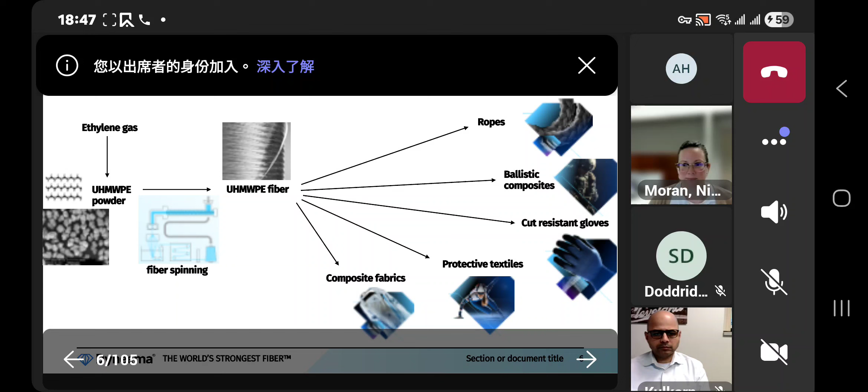Last but not least, also on the fabrics and composite side, we have some nice examples of market launches based on our innovation, and that's where we're going to start today. So Meredith will start off with a short presentation on composite fabrics. Don't want to take too much of Meredith's time, so Meredith, the floor is yours.

Meredith, is she in? Meredith, if you're on mute... we heard you for a second, Meredith. Am I back, and can you hear me? You're back, and we can hear you.

Great, okay. So this talk will be maybe a little different from the rest you've heard over the last couple of days, and a bit shorter. Partially because at Dyneema, at our core, we're not really formulators, so our value proposition is not so much in what additive package we can offer to solve a customer problem. Instead, we're essentially a brand based on a technology platform. So although in markets where we're already well established we do innovation based on market pull and develop products based on deep understanding of customer needs, generally the way we grow into new markets is to do some amount of tech push, and we look for new areas.

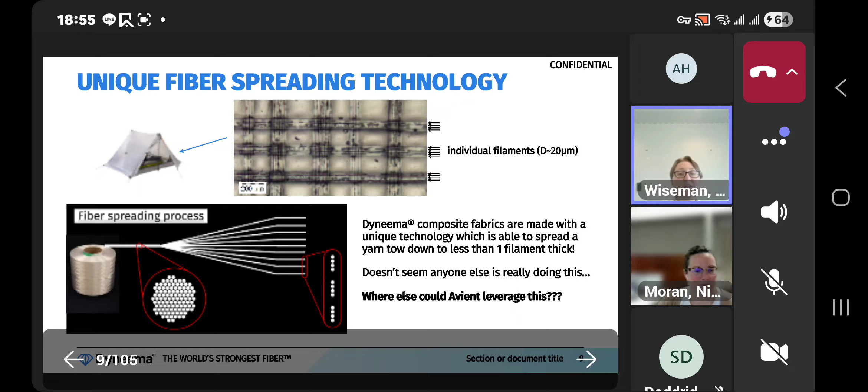Right, so I've only so far shown you applications that use a form factor like a fabric, but there's no reason to limit yourself to fabrics. It could be some other form factor. Even staying in 2D, you could think of this as a general way to reinforce a film, which is maybe too weak to do whatever it needs to do. In other words, it could function like a scrim to reinforce a film. Or if you want to think in 1D, you could use this as a unidirectional tape. And maybe you could take that tape and wrap it into a three-dimensional shape, etc.

It also doesn't need to be in lightweight applications. You could also use this in a conventional composite if you needed to minimize the ply thickness to achieve some kind of performance benefit. Or even in general, if you're making any kind of unidirectional composite and having trouble with tow spreading, this could be a way to improve the quality of your product.

So again, open question to you: could you use this? Could your friends use this? Can you think of any applications or areas where this might come in handy? If so, please reach out and let's have a conversation. And yeah, that's my last slide. Thank you.

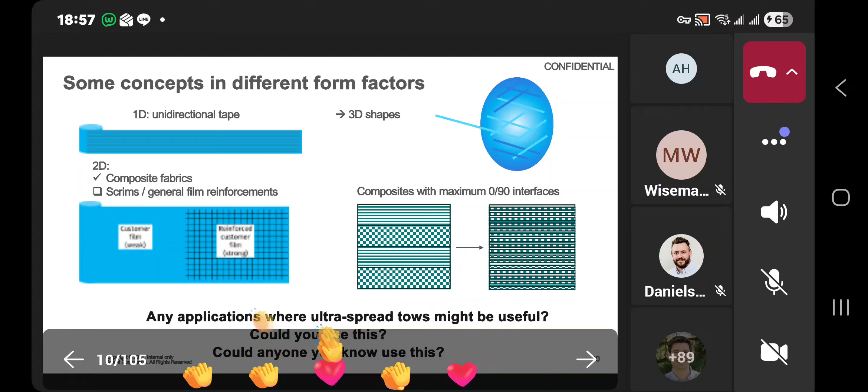Well, thanks a lot, Meredith, and thanks for the invitation to all of us to think about this. Like Ashish said, the whole should be bigger than the sum of the parts, and I think that is also an example where we really try to leverage all the knowledge we have in Avient, especially in the field of composites.

Thanks for that. We move to Judith. Judith is one of our experts — oh no, sorry, we go to Raoul and Hans first on the fire resistance for ballistic armor. So Hans, I think you start off.

Yes. Okay, I'm doing this presentation together with Raoul. Raoul is a member of the innovation team, and I'm part of the marketing and sales team. We will tell you about the efforts we have done to increase the fire resistance for ballistic armor based on Dyneema. Next slide, please.

I will have a short talk about what Dyneema is and also the need for the fire, smoke, and toxicity properties that we see in the market. Raoul will introduce the two routes we have explored to improve those properties, resistance against fire and smoke. And in the end, we come with short conclusions. Next slide, please.

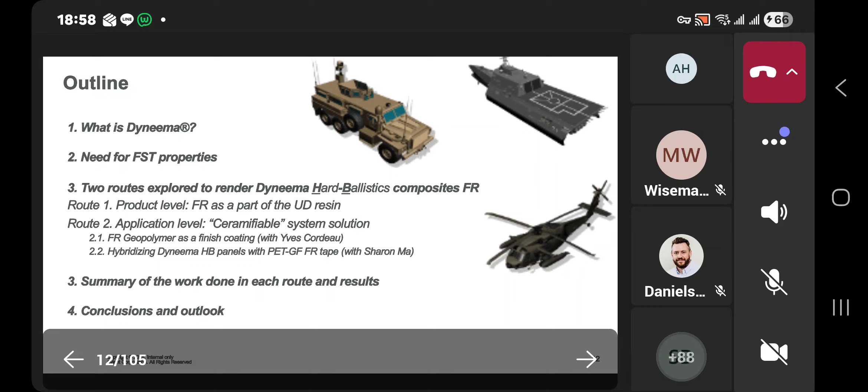Dyneema, as also Meredith said, is a fiber made of ultra-high molecular weight polyethylene. It's 15 times stronger than steel, and still light enough to float on water. With this fiber, we make so-called unidirectional sheets. You see here the fibers put parallel next to each other. There is a resin included to keep those fibers together, and we add other layers of fiber perpendicular to the first one — that's how we make a UD.

And we sell that on big rolls. Our customers then make the armor panels out of it by consolidating in a press. Next slide, please.

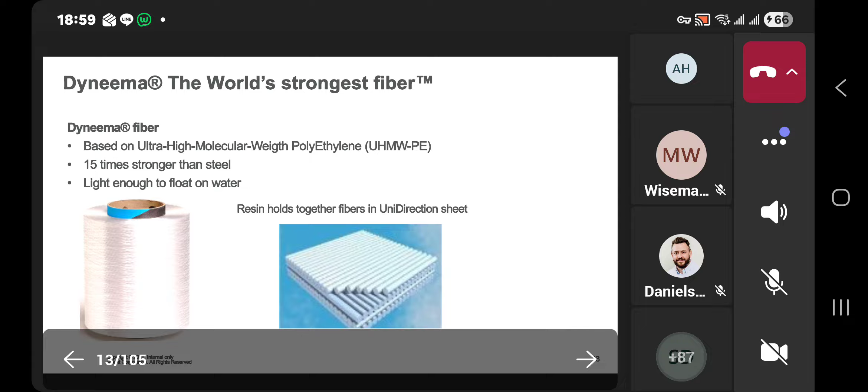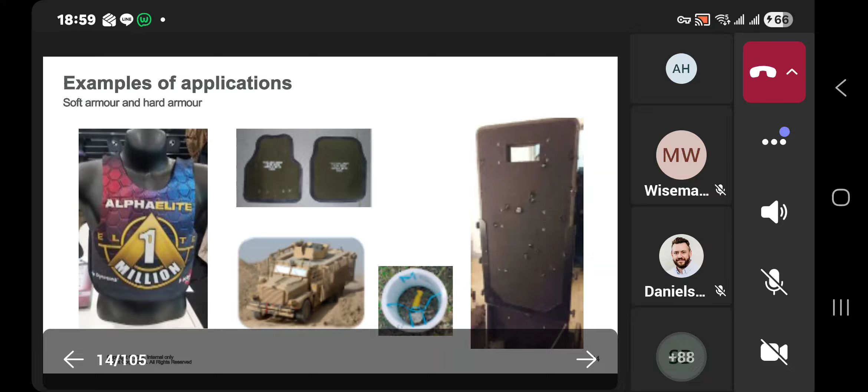Here you see some examples of hard ballistic armor and soft ballistic armor. On the left, one of our customers has sold over more than 1 million vests to the US law enforcement community. On the right side, you see an example of a shield, and this shield has been used and saved lives in the Bataclan events in Paris in 2015. Next slide, please.

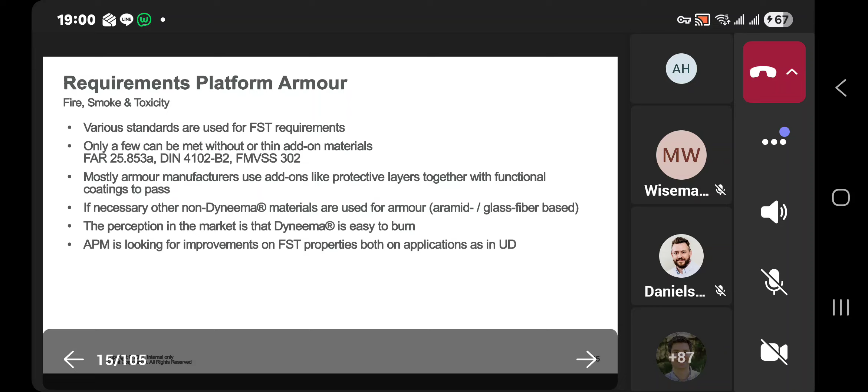What you see in platform armor is that there are typically requirements on fire, smoke, and toxicity. There are various standards used for these aspects. We can meet a few of those, which include a vertical flame test with our material. Mostly armor manufacturers use add-ons like protective layers or functional coatings to pass their test — that could also be glass fiber or aramid fiber-based fabrics. The perception in the market, especially in the end user market, is that Dyneema is easy to burn, and we are looking into improvements in our materials to have better resistance against fire, smoke, and toxicity. Next slide.

Okay, so I take it over. Yeah, we have some ideas how to render Dyneema composite flame retardant. But before we can do that, we have to realize that the flammability of polyethylene is determined by its high rate of thermal degradation and high heat of combustion, which is one of the highest amongst many synthetic polymers.

But if it ignites, the rate of degradation is so high that it burns very fiercely. This high rate of degradation, combined with the high heat of combustion, makes it much easier for polyethylene than other polymers to burn and self-sustain its own combustion cycle. It also makes it very difficult to self-extinguish, and this self-extinguishing ability is much desired in many of the flammability tests that Hans mentioned before, which are relevant for the application we are targeting.

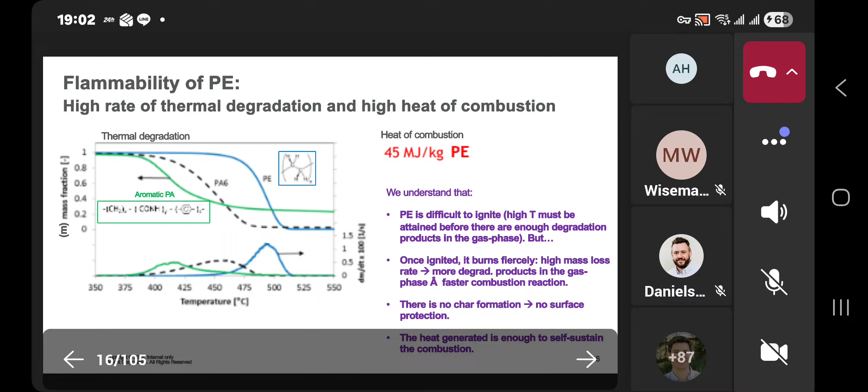So that's why for Dyneema composites, we need a flame retardancy approach that first takes advantage of the high thermal stability, this resistance to ignition which is intrinsic to polyethylene, to delay or even suppress totally ignition in the application. And if ignition happens and the material is burning, we need to promote formation of some sort of protective barrier that reduces the rate of thermal degradation and reduces burning time.

We explored two routes to make Dyneema flame retardant composite. The first route, at the top, is at product level, where we ourselves add a flame retardant additive to the matrix we use to make the composites. This approach has the lowest impact on weight of the composite.

Route two is what we call an application level route. In this case, our customers will have to either apply a flame retardant as a finish coating, for instance using an Avient geopolymer coating, which needs to be applied to already consolidated panels. Or a second possibility is that customers make hybrids of Dyneema composite sheets with a glass fiber reinforced PET composite made by Avient, which also contains a flame retardant, by alternating these layers and consolidating panels out of them.

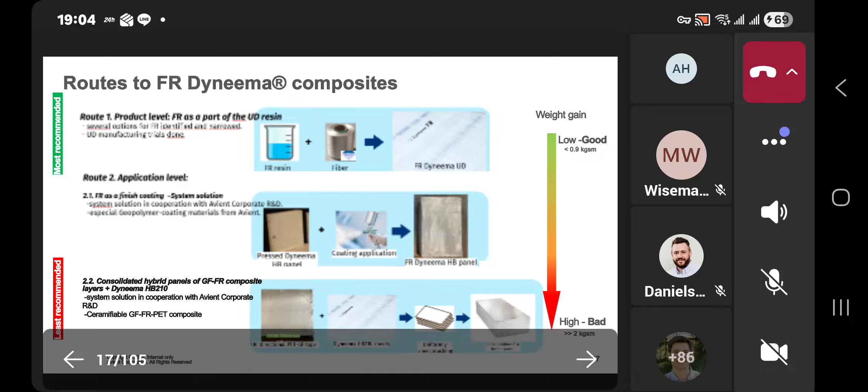Now I will show you some examples of what we have seen. Here are the results of adding a flame retardant within the resin, at product level. This is a very harsh test we did, a so-called torch flame test. You have a sequence of pictures as a function of testing time for two types of materials, without and with flame retardant.

Without flame retardant is at the top, and you see that as soon as the torch and the flame make contact with the composite, it catches fire quickly, burns with very tall flames, and simply burns to the clamp. This is very bad, and you see that the material is melting and dripping, etc. All those things we don't want to see, and customers don't want to see.

In contrast, with flame retardant, these are the bottom pictures. There is some burning of the material, but it's very localized, and every single sheet of this panel is forming a char, which helps to reduce the heat release and helps the material to eventually self-extinguish. A bonus in this case is that the ballistic properties of these panels are retained.

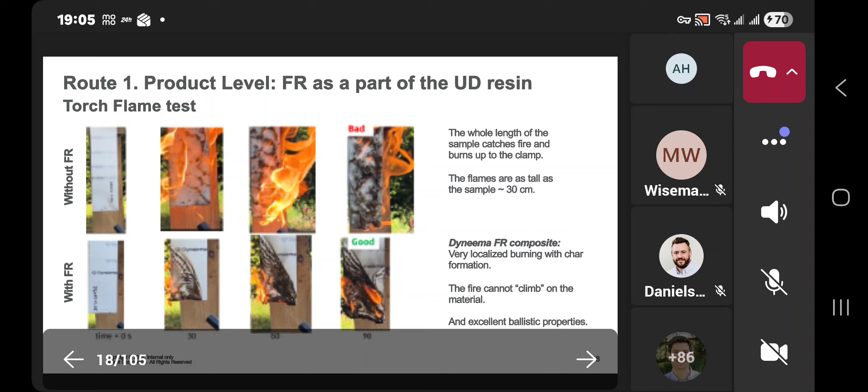This is yet another example, the approach at application level, where we applied a geopolymer finishing coating. You see here two sequences of pictures, top and bottom, for Dyneema without any coating. Without protection, it catches fire very quickly. There is a very long after-burning time. It needs to be blown out to put out the fire, and then you see how the panel looks at the end of the test: totally burned, destroyed, melted away.

While the panel with the coating, you see here that it's very difficult to ignite. It doesn't ignite, and essentially nothing happens, and the mechanical integrity of this panel is preserved, and the test is passed.

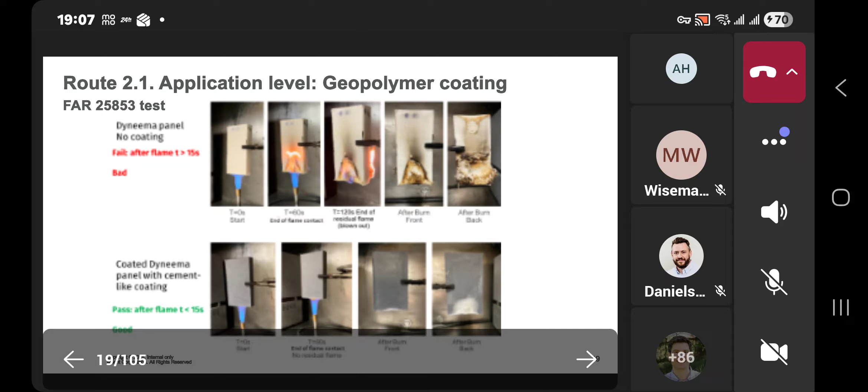This is the same test, but in this case we hybridized the Dyneema material with a glass fiber flame retardant PET from Avient. We did this same type of test, a sequence of pictures as a function of burning time. You see that the material at the top row, without flame retardant, surprisingly didn't have after-flame time even after 60 seconds of flame contact. But you also see during the test that the material is much more exposed to the burner, and this makes it look not so good.

On the contrary, the material hybridized with a glass fiber flame retardant won't catch fire as quickly, and at the contact of the burner there is this glowing effect, meaning the material is radiating heat away from the flame contact. This is the type of effect we want to see, and it offers some protection against fire.

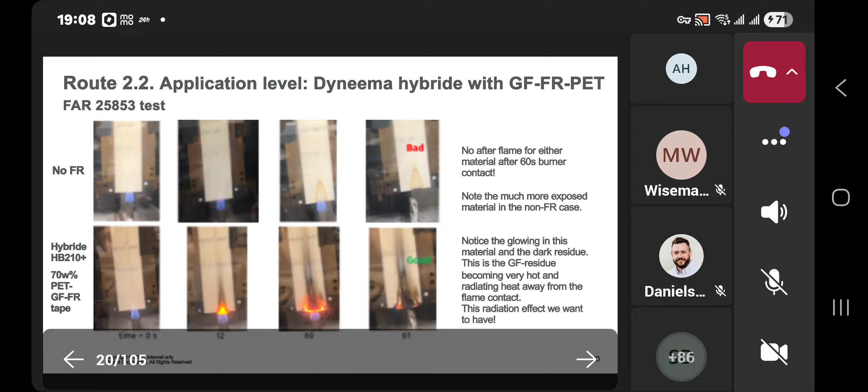Concluding, we explored two routes, one at product level and the other at application level, and both are very effective and meet the requirements to pass the relevant FR tests. We are recommending a solution at product level because of weight gain reasons.

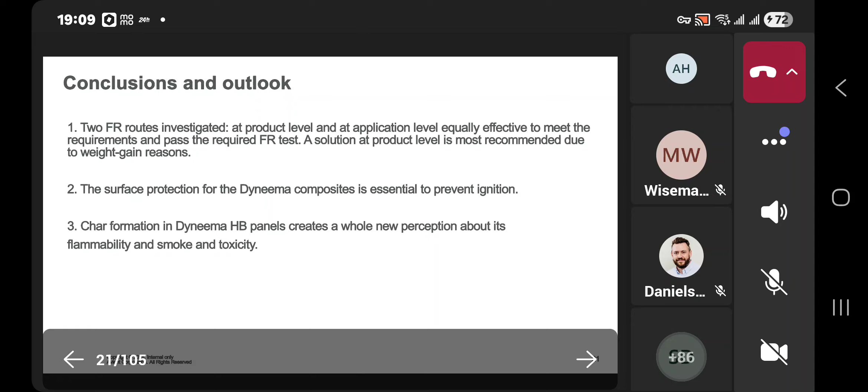We see that surface protection of the Dyneema composites is essential to prevent ignition, and if ignition doesn't happen, the material won't burn. We are convinced that char formation in Dyneema consolidated panels will create a whole new perception and change the perception that is out there about its flammability, smoke, and toxicity. That's it. Thank you.

Well, thanks, Raul, for the presentation, and Hans also for explaining the segment a bit. I see there are some questions in the Q&A chat, so maybe good to also try to answer those. And Meredith, I see also a lot of remarks and questions regarding your presentation. I think we are still a bit ahead of time, which is good, I believe.

I would like to give the floor to Judith. Judith is one of our researchers for the marine and industrial fiber segment. So Judith, can you start? Can you hear me? Yeah, can you hear me? Yes, we can. Okay, thanks.

Thanks for giving me the opportunity to present to this audience the interesting market developments for our subsegment marine and industrial fibers, and what we in innovation have been doing and need to continue doing to grow the segment. My name is Judith Bos. I'm working as an application development manager in Avient Protective Materials.

An outline of the topics in my presentation. I will first give some insights into the customer base for applications for marine and industrial fibers. Then I will highlight the difference in requirements between the two biggest segments in Avient Protective Materials: marine and industrial fibers versus personal protection. Then why it's important for us to be back and forward integrated, and the engineering tools that we have been developing based on these principles.

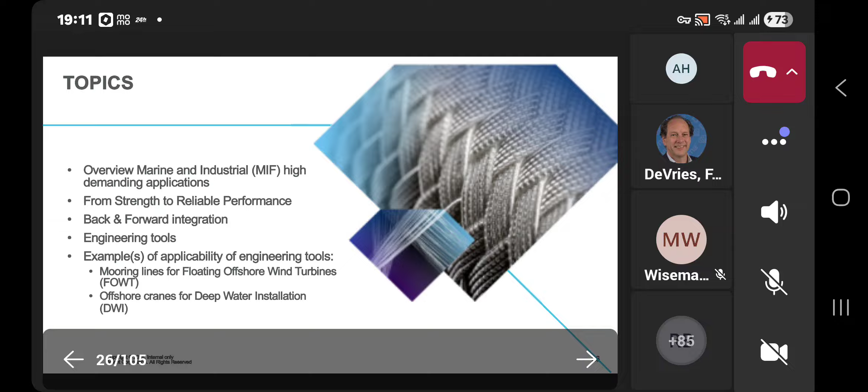Since I'm aware that not the full audience is familiar with our segment, I want to give an overview of the applications where we sell in and the form factors. So we sell fibers, and our customers make ropes, nets, slings, and synthetic chains from these fibers. In these markets, we did very good ingredient branding because they are often called Dyneema ropes, Dyneema nets, which makes end users often think that we are the producers, while we are only the fiber supplier.

These products are sold in markets for heavy marine, so for vessel mooring in harbors. That is our biggest market, but also in slings for heavy lifting, nets for aquaculture like salmon and sea bream farming. And one of the markets with higher brand recognition is, for example, in yachting - think of the Volvo Ocean Race, Olympic sailing, but also synthetic chains for lashing and lifting.

Probably all of you know the container ship Ever Given blocking the Suez Canal for 6 days. This salvage operation has been performed using also ropes with Dyneema. So you see that it's diverse markets with very different market dynamics. Let's go to the next slide.

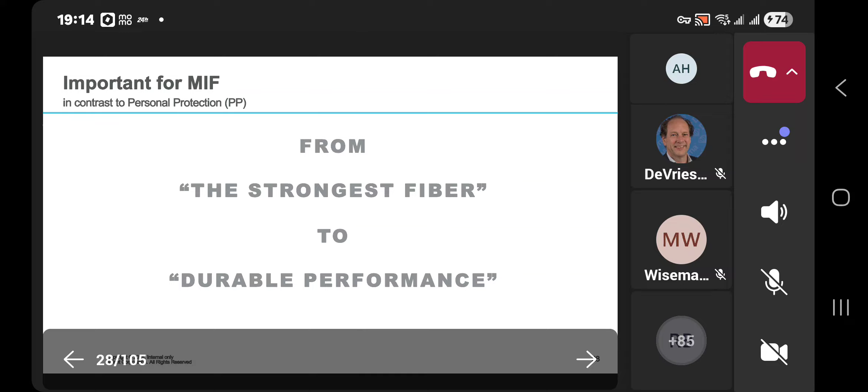We can go to the next slide. In order to get this durable performance, it's important to understand what is going on in a rope while being used in these applications. We often refer to these failure mechanisms in simple terms of A, B, C, D, E - where A stands for abrasion, meaning external abrasion, for example when a rope is running over fairleads in vessel mooring. Bending creates internal abrasion by friction in ropes. Creep is typical for high modulus polyethylene - it's elongation by sliding of the molecule with a constant load or a dynamic load, and then at a certain moment it breaks.

Damage is mainly external damage from sharp edges or what have you. And the environmental conditions are related to the forces of nature. So UV, temperature, seawater, but also the surrounding where the rope is working. And sometimes there are detergents used. The question is, how susceptible are our materials for that?

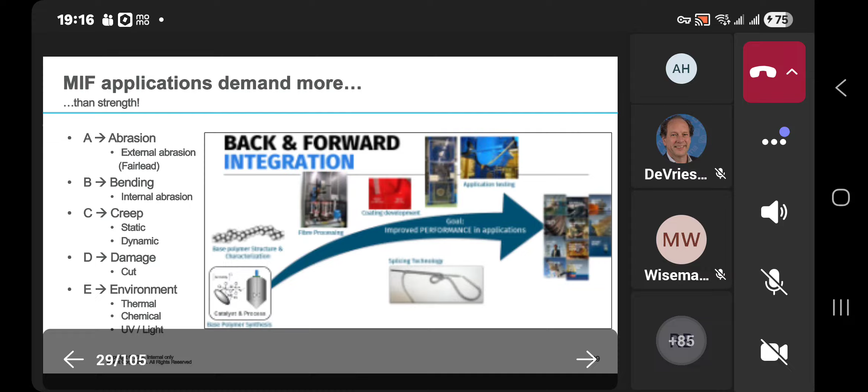What I think is important to highlight is that these testing efforts are of course important to break, but that is really research. In order to make the transition, we have to go from research to engineering. Research really looks into the number of breakage, cycles to breakage, how strong it is, and so on. While engineering is about preventing the breakage in the application and making sure to set up reasoning why it's safe and reliable to use Dyneema in that specific application.

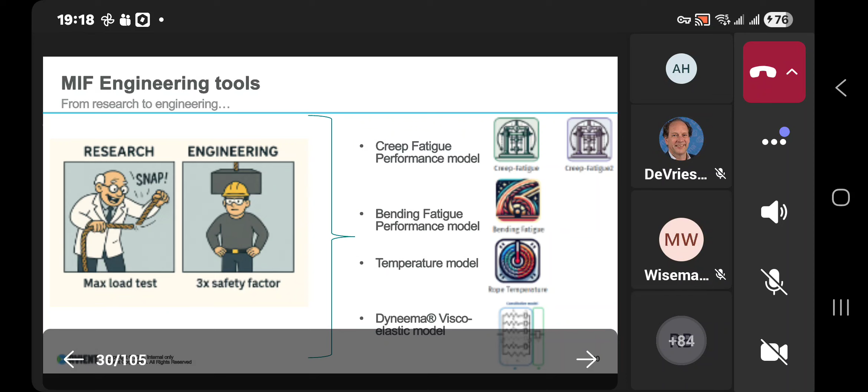This is not a one-time effort, it is continuously monitoring and learning from what we do in application development in our global innovation centers, but also from market feedback. We are in close collaboration with our customers, but also with end users to get back ropes and slings from the market, where we perform what we call the rope CSI to improve our understanding. These learnings we also use to improve our models. That is why you see, for example, not only creep fatigue 1, but an improvement of creep fatigue 2 mentioned on this slide. Go to the next slide.

Here you see 2 applications that I want to highlight further on in this presentation, because these engineering tools have been very vital to these applications. And this is not something that our competitors are able to do.

The first one is mooring ropes for floating offshore wind. Offshore wind is already an important segment using slings for lifting and installation of structures for fixed bottom. However, fixed bottom is limited to water depths of 50 to 60 meters. And if you want to go deeper, to deeper water depths, where often more wind is available, it's necessary to put the turbine on a floater. And of course, this floater needs to be moored with mooring lines to an anchor to the seabed in order to keep the station keeping, to keep it stable. In the next slides, I will explain how the engineering tools have helped with that.

Another application is in offshore cranes, where we have been substituting steel cables.

For mooring lines in floating offshore wind, the requirement is more than 25 years on lifetime. These mooring lines are under constant load, and creep is the Achilles heel for HMPE. So in HMPE, when there is a constant load, the molecules will start sliding along each other, causing an increase in length until breakage occurs.

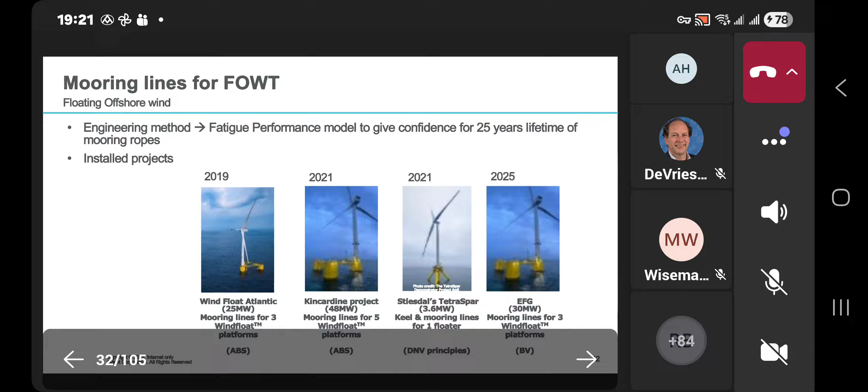One thing good to mention is that the Stiesdal project will be decommissioned this summer, and we will be able to get ropes back in order to determine the remaining lifetime and compare that versus the predictions.

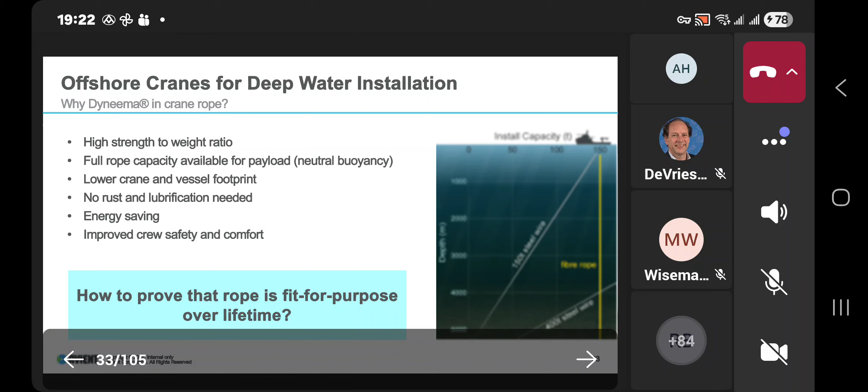The next example I want to highlight is offshore cranes for deep water installations, where the advantages of Dyneema over steel are obvious. The example in this picture shows that with a 150 ton crane used to put a load on the seabed at 3,000 meter water depth, the weight of the steel cable already takes half of the crane capacity. For Dyneema, which floats on water, this does not impact the crane capacity, so the full rope capacity is available for the load. This results in lower crane and vessel footprint, and energy saving as well. Since Dyneema doesn't rust, you don't need any lubrication, and because it's light and soft, it improves crew safety and comfort.

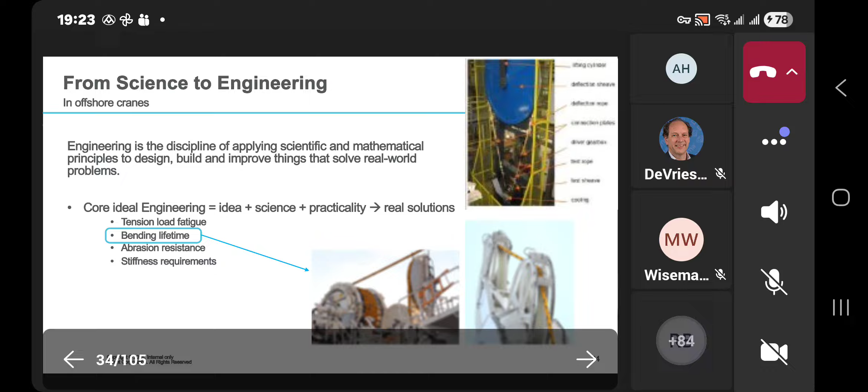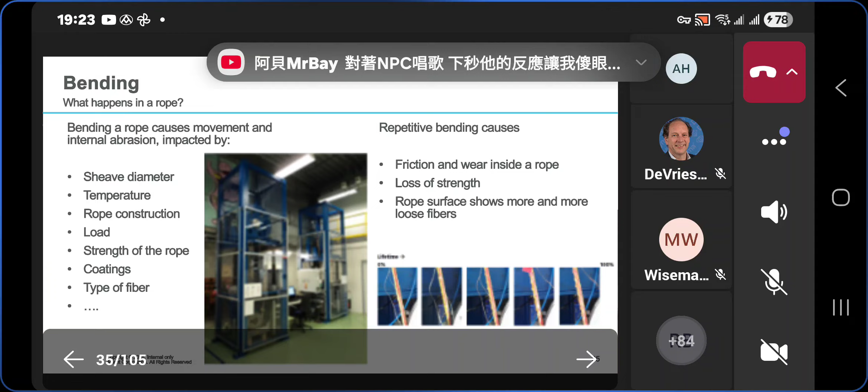What actually happens when bending such a rope repetitively over a sheave is that you create internal friction caused by abrasion inside the rope. This leads to a decrease in strength, which can be observed by an increased number of loose filaments on the surface of the rope, which finally leads to breakage.

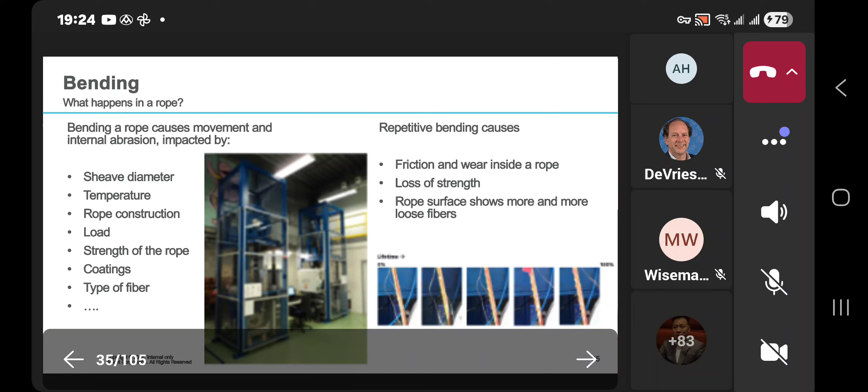There are several parameters impacting the number of cycles. For example, a smaller sheave diameter is more severe, giving fewer cycles to failure. Temperature has a negative impact. Higher load means fewer cycles. And we also know that friction between the different fibers plays a role, so we have developed coatings on fiber and rope level to improve that performance.

This bend testing has generated a lot of data and has been turned into a bending tool. I won't go through all the examples, but it's important to mention that within the engineering, we try to be conservative because we want to prevent breaking. The dotted line in the force versus number of cycles curve shows how the holding capacity or break strength of a rope normally decreases with the number of cycles, and the blue line is how we look at it from an engineering point of view.

What's important is that different sheave diameters and loads have a different impact on the number of cycles. We've found a formula giving a good correlation between these loads and sheave diameters versus rope diameters, capable of predicting the numbers of cycles we'll see in the application. It's also a powerful tool to reduce the amount of testing we need to do.

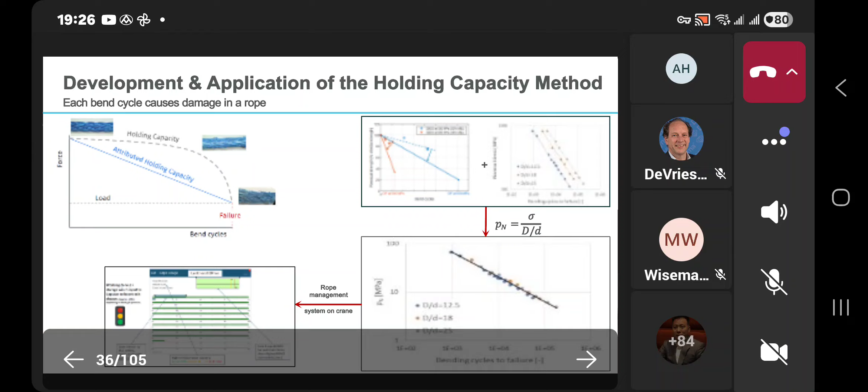Although the picture at the bottom is small, it shows a monitoring system on a specific crane, with every green part showing 1 meter of this 3,000 meter long rope, exactly monitoring which meter has seen how many bends. It turns from green into orange to red, so the crane operator knows when he needs to take action and have the rope switched out for a new one. This is actually installed on an offshore crane used in the Gulf of Mexico.

I think it is good to see that now 2 offshore cranes with Dyneema are operating, one in the Gulf of Mexico, the other in the Middle East. This has only been made possible due to the engineering tools in combination with certification and our efforts in the value chain, partnering up with all the players, from our direct customers to the owners, to the crane operations.

That is where we are now. We are getting samples back in order to do our rope CSI to look at the failure mechanisms. Didn't we overlook something? Can we improve our value proposition? And of course, the target is to have more ropes with Dyneema sold in the application.

So in conclusion, to be successful in new applications with Dyneema, we need good teamwork. It's not only about sales, not only about development, we really need to work together. And that is up to the team in application development.

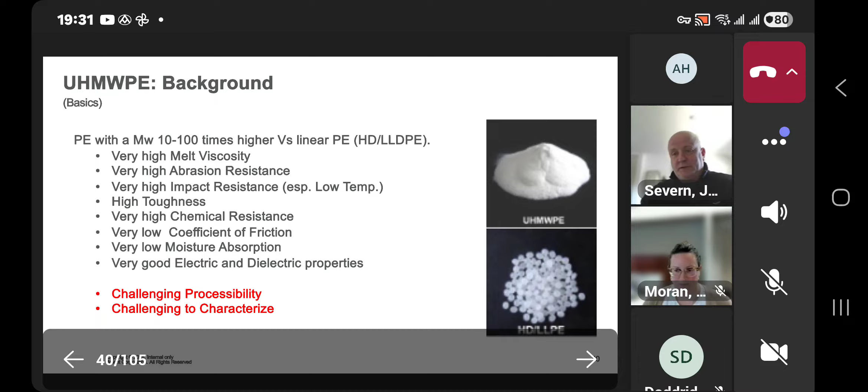But with that comes a challenge. The high melt viscosity also makes it very challenging to process in conventional terms. And also, because the molecules are so long, it's very hard to fully characterize. So you're not going to run a SEC of ultra high molecular weight and expect to see everything that you should see, for example.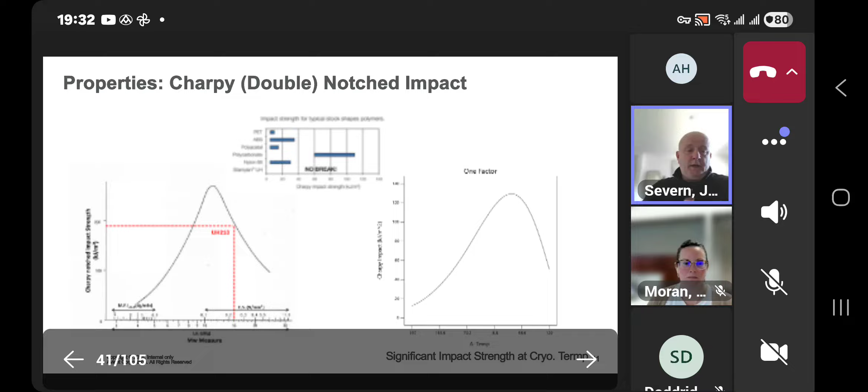Another big value proposition is the coefficient of friction and wear resistance. So the combination of wear resistance and coefficient of friction allows a lot of different applications where parts are moved across surfaces. That's also the three main properties of ultra high that sell in our non-captive business.

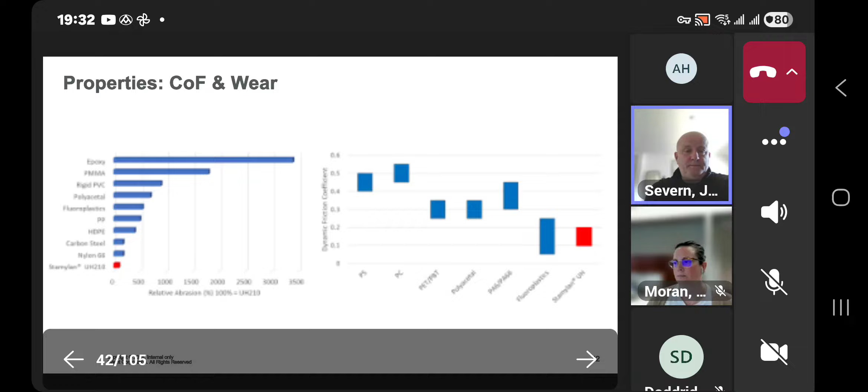If I can move on to the next slide, please. So this just gives you an idea, because we don't form films in the normal way.

We don't extrude in the normal way. Basically, we make ultra high molecular weight material, and depending on what you want to do in the end application, we either ram extrude or use injection molding for very low molecular weight material. But traditionally, it's mainly sintering, where you compression mold or ram extrude, and then machine a part for different applications, depending on the combination of things. For example, pumps for chemical plants typically have gears made of ultra high molecular weight polyethylene because of wear, friction, and also high chemical resistance.

There, also on our side, we're mainly focused on gel processing. So our fiber spinning is basically a gel processed material. The other big gel process material are things like lithium ion battery separator films. And a growing interest is in compounding ultra high molecular weight into engineering materials, either to improve recyclate properties or to basically add wear and friction resistance to an engineering material.

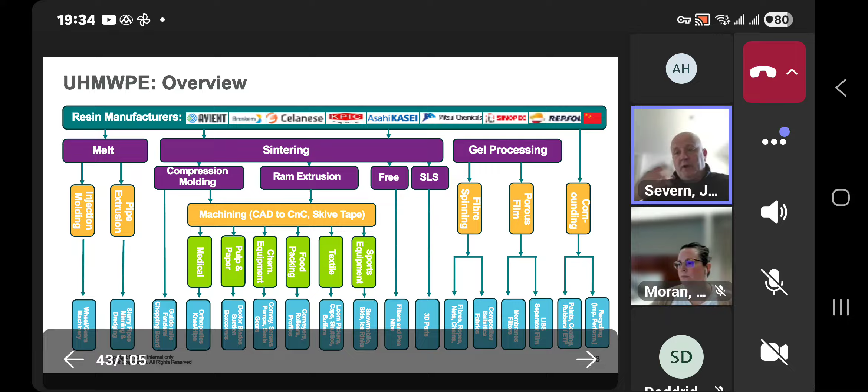If we want to step one more forward, please. Just to give you how we basically approach things from an APM point of view, we look at things in length scales. So if there's a problem or an opportunity, we first try to fix it at the continuum or the macro level. For example, if we're looking at a new rope, we'll first have a look at what can we do in braiding, what can we do in that sort of thing. That doesn't mean starting right at the bottom with molecules. So this is how we approach a problem.

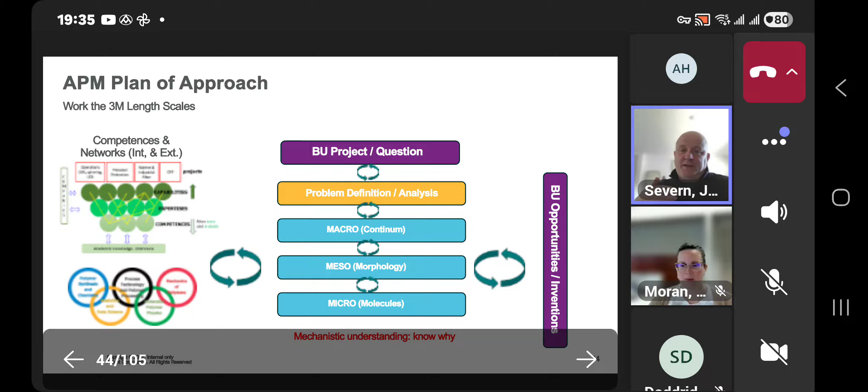It's only when it gets to the bottom, where we can't solve it any other way, that we start looking at the molecules. So for us, if we need to do something from the UH group, it's because it really can't be done any other way. And that's the advantage also of being backwards integrated - we can make the molecules that will make the morphology and get what we want on a macro scale.

So if we go to the next slide. We design UHMWPE in 3 different axes, let's say, or we call it our 3Ms. Microstructure, that's basically how long the molecule is, what sort of side chain branching there is, even down to end groups. What we call modality or distribution, which comes via molecular weight or chemical composition - so where are the branches? Are the branches in the high end? Are the branches in the low end?

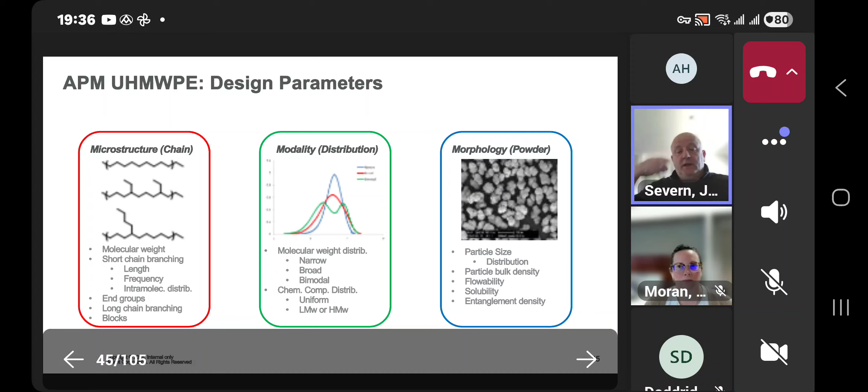And then because our final product is not a pellet, it has to be delivered in a form factor that fits downstream processing or the application people have in mind. So as an analogy, if I can have the next slide please - you know, from microstructures, we sort of design the flavor. We combine those flavors into a blend. And then all of that flavor and blend needs to be in the right size grain for your equipment - the grind, that sort of coffee grind analogy is how we design things. For certain applications, you might need a smaller particle size; for others, a higher particle size.

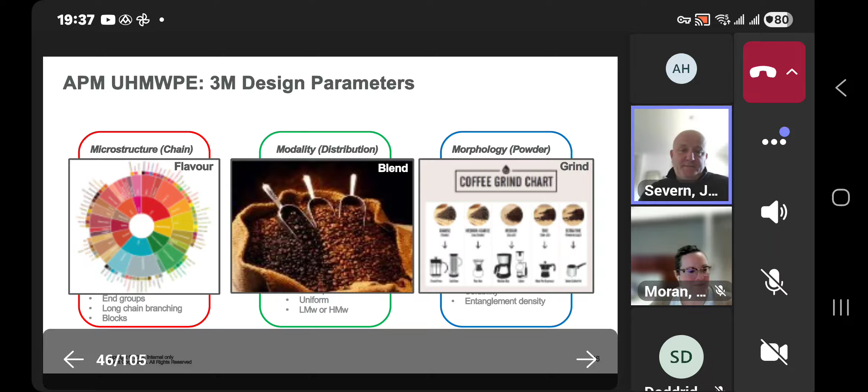If we can have the next slide, please. So how do we basically control it? We control it via a mixture of understanding catalyst technology and polymerization technology. We can design the perfect catalyst that has great DNA, but if we put it in a poor environment, it's not going to make the product that we want. So what we do within the group is bring together the knowledge on catalyst technology and process technology to be able to design in these 3 axes. That's basically the core of how we pull on the strings to design things.

If I could have the next slide, please. Sorry, there was an animation in that one.

What we have basically in our lab, we are very fortunate to have everything from explorative to pilot scale in one lab. If you look at it on an explorative scale, we have what's called a 2-liter reactor where we make 200 grams of polymer per batch. Anything that's very new, we usually try in this one because if we make a mess, it's easy to clean - harder to clean at scale, let's say. So everything that's not known is tested out on this. Here we have the ability to look at co-monomers like propene, butene, and higher alpha olefins, also with hydrogen to regulate the molecular weight.

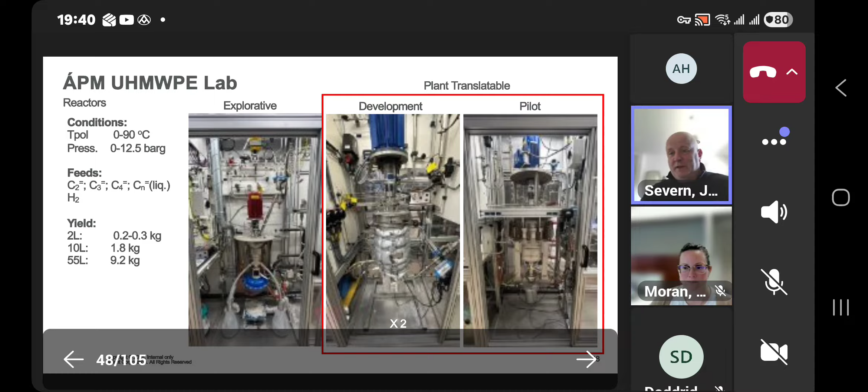So that's basically our capability, and there's quite a lot of things we can do and try that isn't normal in these reactors, let's say. If you want to go one slide further, please.

These things are also fully automated. We do this to reduce the exposure of our technicians to chemicals, but also once it's fully automated we can get as much information from each and every reaction. So not only do we analyze the polymers, but we can follow full kinetic data and predict how we can adjust our temperature control, for example, or where we're reaching problems with cooling, or problems with stability in a larger process.

This can all be mapped on our 10 liter and 55 liter reactors before we go to the plant. In this case, we're much faster translating from bench scale to plant, and we're less likely to make failures, because if we make a mess in the large plant, that's 4 or 5 days out of production. So nobody likes to let us in there if that's what's going to happen. We tend to fail fast on these reactors so we don't fail on the larger ones. If you could go one more, please.

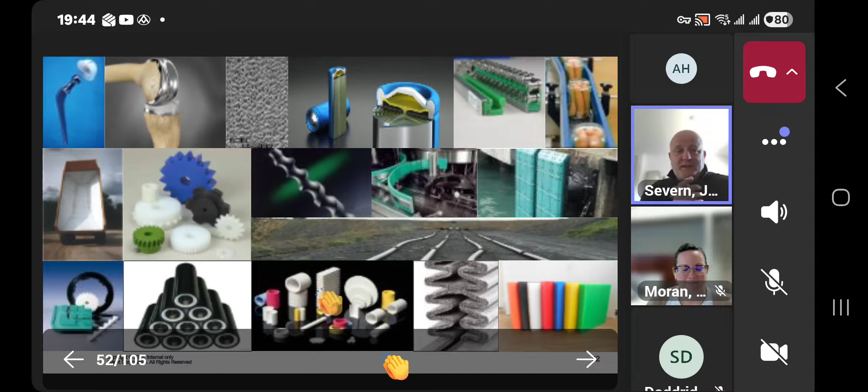That just shows some of the various things UH can do. With that, if anybody wants to get in touch with us, we're more than happy to discuss what you could do with UH, or what we could do to help you do something with UH.

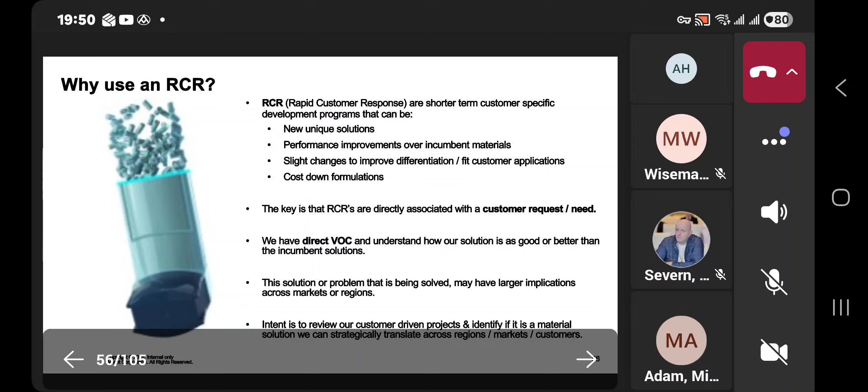So when we look at RCRs, we're thinking, okay, we can't do it for every RCR we do. Currently in SEM North America and Europe, 70% of our business is RCRs. So we do a lot of different things for a lot of different customers. What we try to do is understand.

Yes, okay, sorry? Yeah, okay. Thanks, Hans. Yep, somebody's not muted. Thank you, well done.

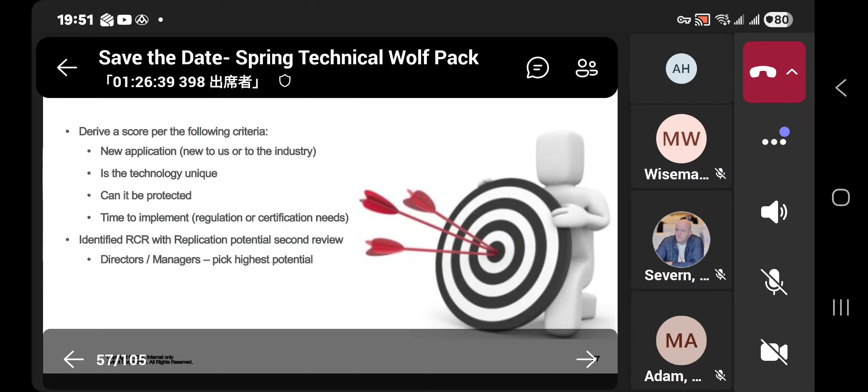So we look at our RCRs and decide, okay, how can we look at these in a different scope? How can we look at these and derive that this is an RCR that we should look at replicating? So what we've done is we've derived a way to try to score these RCRs in a very quick way. That doesn't mean that some RCRs that score low may not be considered, but it's at least a starting point when you're talking potentially hundreds of different projects that we're working on.

So we want to look at, is this a new application to either Avient or to the industry? Is it a unique technology we've derived? Can this technology be protected? Is it something that can be trade secret or IP protected that may give us a differentiation or an edge? And also time to implement - was this, for instance, solving a regulatory need that has already put us ahead of our competition potentially?

So once we do that, the team will go through - and this is a team of the ADTS, the product development team, etc. - will review this and determine, hey, we think we have something here. We think that this application that we derived is unique enough that it might work for other similar applications within a customer or within a market, or because of the performance of this, it could work in several different markets or even regions. Once we have done that, we then put it into the scoring, and then we go review that.

So this just shows an example of what we looked at within SEM North America, and we even drove it down further to look at the healthcare market, for instance. And we tried to say, okay, based on that criteria that we had set out, as rudimentary as it is, is there anything that floats to the top? Is there anything that we should really look at here?

And for this example, as it shows, this tubing mandrel that we looked at using a TPE material from our GLS technology had something unusual. It was a new application either to us or to the market that hadn't been done with TPE before. It was a new technology that we derived, and it was protected. Now, was it regulatory driven? No, but it was still something that came out and said, hey, this is unusual.

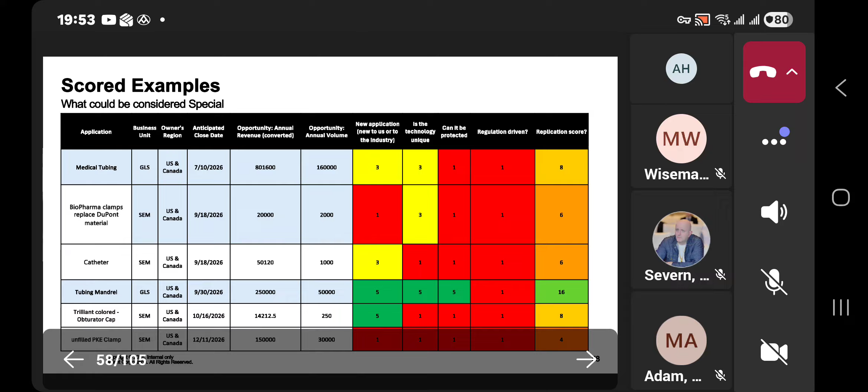Once we as a technology team have gone through this and identified these opportunities, we want to partner with our commercial and marketing teams and say, hey, this is what we think. Is there really something out there? Those teams will take it and do a deep dive to understand if there's market potential, and build customer lists, for instance.

More importantly, we want to understand how we can demonstrate this material's performance for that market. So we'll look at ways to characterize the material through different analyses for a customer, what type of market data we can produce and provide, and what type of demonstration pieces or samples we can give them.

Many times walking in with a data sheet or a tensile bar isn't really going to tell the story. But if we can provide something tangible that the customer can put in their hands and say, wow, I really do like this, now they can understand why we've come to them with this particular technology and how it can be of value to them.

In this journey thus far, we've identified within the SEM Atlantic business three different areas to pilot. The first is a VersaFlex thermoformable TPE, which I'll talk more about. The second is a VersaFlex wet grip TPE, which retains its grippy performance even when wet. And finally, our Maxxam FR/5VA material, the next level in flame retardancy, used for things like appliances.

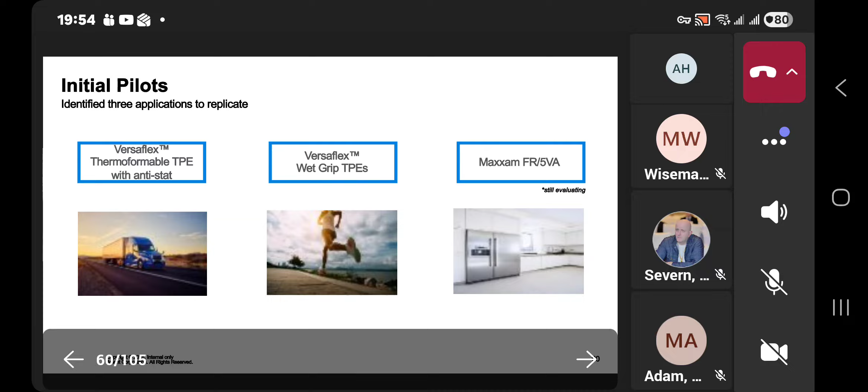We wanted to go through a great example of something unique within our TPE business, where we solved a problem for Tesla that could be put into their semi-truck. What we created is an anti-stat material, a TPE-based product.

It has abrasion resistance, etc., but what really makes this unique is its ability to be extruded very nicely into sheet and then thermoformed into a very intricate shape that fits the customer's application. Typical TPEs can't survive some of the undercuts during thermoforming—they'll stretch, tear, or bubble. But in this instance, the team came up with a fantastic solution that has the melt strength and retention to be formed into this shape and still survive.

We also looked at feedback from this program, showing it performed as expected and performed well on the processing side. The VOC we received from customers, like the extruder, was that this material runs great—there's something truly unique that allows it to extrude well, and they want to look at it for other applications. When you get that kind of feedback from processors, the light bulb goes off and we ask, if this stuff extrudes so well, where else can we put it into extrusion applications?

We know it thermoforms very well—where else can we use it in thermoform applications? We know it's being used in an industrial application, in this case a heavy truck application. How else can we proliferate this within that market and also across other markets?

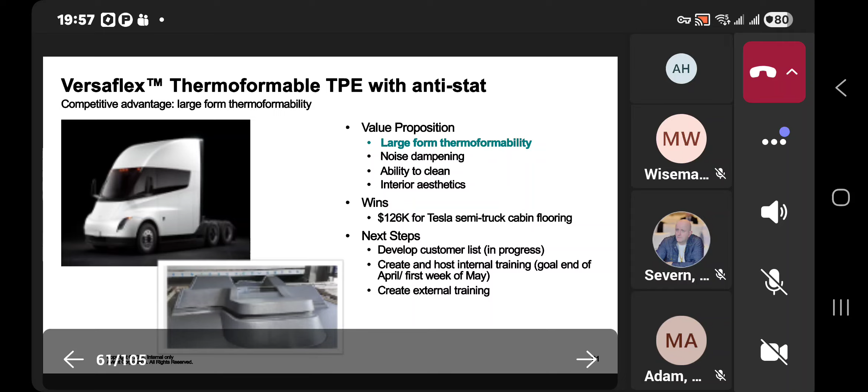The next steps for this pilot are to develop a customer list, which is in progress, create a host of internal training, which we're also doing, and create prototype parts to demonstrate performance to a customer. Corporate R&D has a thermoforming capability we're going to investigate, and we'll look at printing tooling for that unit to really demonstrate how this material performs. It's all a push to demonstrate performance and get in front of a customer with a known product solution we can quickly bring to market.

So I've gone through this rather quickly, but I wanted to highlight what it takes to get a project from understanding its replication potential all the way to doing it. This gives you an idea of the timeline to do something like this.

Again, we won't do this for every RCR that's out there. We want to make sure we understand what problem we solved, how did Avient win, and how can we take that solution and proliferate it.

Like I mentioned with the Tesla example and the other two pilots in place, we're now developing the application package for sales professionals, and we're going to launch that in July to get it out into the market. At that point we can start measuring success, with a campaign around it. Any new opportunities that come in, we'll measure against that. Our goal is to have 3 closes within this year with replication potential.

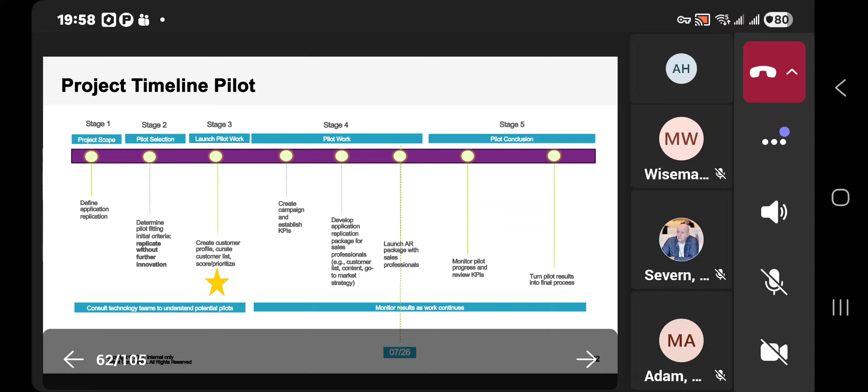And I think that's it. Next slide. So if you have any questions or if you're interested to know more about how we're progressing through this, please reach out and let us know.

As I mentioned earlier, the Dyneema business has done a very nice job of taking their unique solution and proliferating it cross-market, which we've seen with defense, marine applications, and consumer applications. And that's my time. Thank you.

Garland had an interesting suggestion yesterday to a question I asked in the chat about working groups, and he identified one that's maybe more generic or broader, around application engineering. Maybe reach out to him - I'm sure it's an idea you have too. There may be an interesting opportunity of how we come together as a company in a working group in the area of application replication and application translation. So thanks, Brad, we'll do that.

Thank you. Thanks, Phil. Thank you very much, Brad. So let's move now to the SMASH technology, and Pauline is going to talk through what that means and how it can also be contributing to being translated in other parts of the world.

Yes, thank you. Hello everyone. I'm really delighted to have the opportunity to present the SMASH technology to you all today, a project we've been working on for 4 years now with Jordi Rigouan, Caroline Marchand, Stéphane Rousseau, and others. Next slide, please.

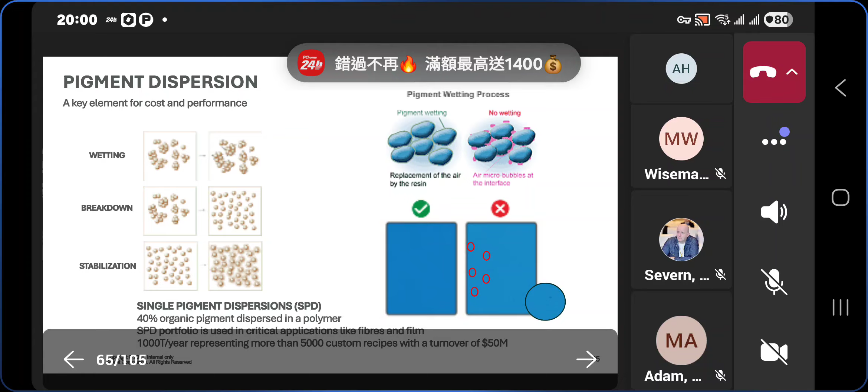So let me start with a challenge any color masterbatch producer faces: pigment dispersion. Dispersing organic pigment is difficult because pigment particles show a high tendency to agglomerate. As a result, we obtain poor dispersion quality, as the pictures show on the right side of the screen, where we can clearly see some pigment spots. On the left side of the picture, we see a deep and intense blue surface with no pigment agglomerates.

At the end, dispersion is about avoiding those agglomerates in customer end products. This is a key factor for processing and quality performance, which can easily drive cost up. This is particularly important for us because of our SPD portfolio, for which we produce more than 1,000 tons a year that end up in more than 5,000 custom formulations representing 50 million in turnover. Next slide, please.

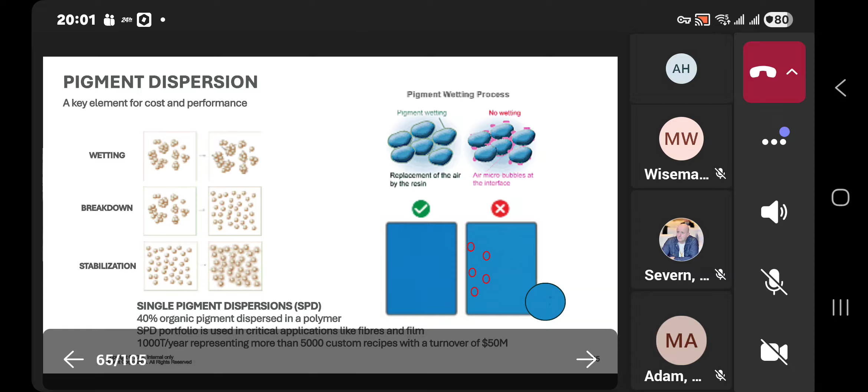Historically, we relied on two main technologies to disperse organic pigments, both quite simple in formulation technique, mainly driven by PE wax or wetting agent, but with complex processing. The wetting agent technology uses PE wax emulsion that brings a high amount of water into the extruder, where we need special equipment to remove the steam afterwards, like long extruders or side vent stuffers. On the other end, the hot-cold mix technology uses solid PE wax and a complex mixing process to melt the wax. It requires specific and low-productivity equipment due to long mixing and cleaning times.

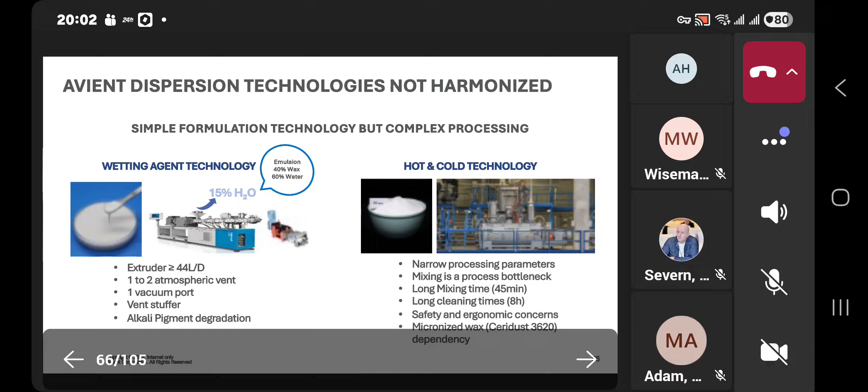So we knew we needed a better way, and that's where SMASH comes in. Next slide, please.

So what was our target then? We wanted to develop a formulation and a manufacturing technology to disperse 40% organic pigment at excellent quality for film and fibers, and top throughput for polyolefin carriers. Additionally, when we asked for VOC and VOB, there was a clear need to reduce costs, improve the regional manufacturing flexibility of the SPDs, and reduce the dependency on PE wax as dispersing agents.

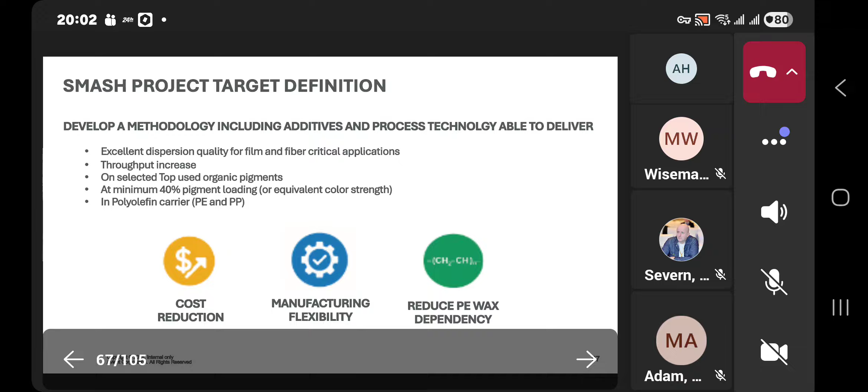In terms of formulation, we used the wetting agent technology as a starting point. The water contained in this technology plays a key role when it comes to dispersion, but we knew we had to decrease this amount of water to gain equipment flexibility.

So to reach excellent dispersion properties, we first need to wet the pigment quickly and densify the mix to allow good feeding of the extruder and ensure high output. This is done by the water contained in the emulsion, but to reach a high level of dispersion we also need to optimize the interaction between the pigment and the water. So we looked at the chemistries that allow this while balancing the amount of water, and we took the direction of surfactants, playing the role of synergist between the pigment surface and the wetting agent.

A lot of different surfactants have been tested, and with more than 100 extrusion trials, our improved formulated solution now contains standard PE wax, a water emulsion that complies with all our regulatory requirements today, and ethoxylated sorbitan esters mainly as a synergist.

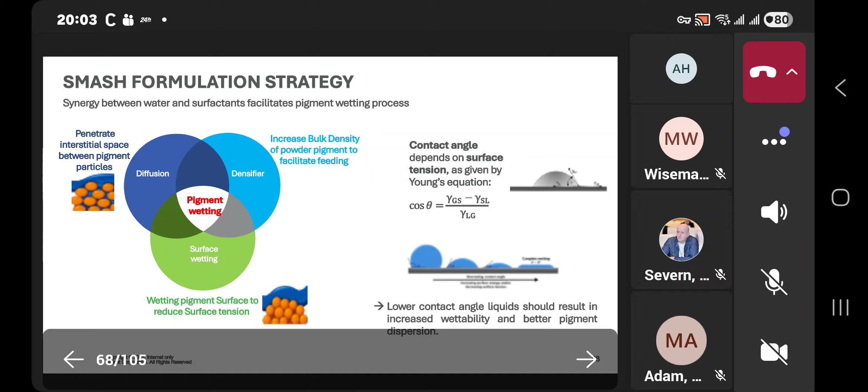So this is what you can see here: the standard SMASH formulation for organic pigment SPD, with the water-based emulsion to boost the dispersion and the synergist to optimize the interaction between pigment and water. This boost is quite mandatory for very complex pigments such as copper phthalocyanine, for example.

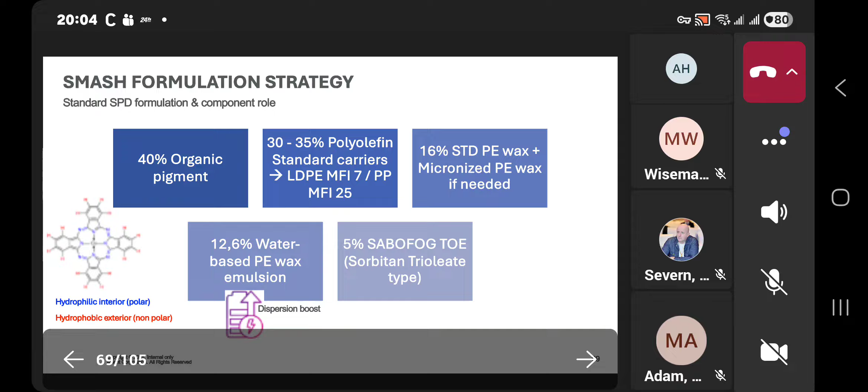You can see the molecular structure on the screen of the pigment. On this particular pigment, the presence of nitrogen atoms contributes to the polar portion of the molecule, while the hydrogen atoms of the benzene rings are highly nonpolar. Thus, the copper phthalocyanine molecule consists of both hydrophilic and hydrophobic areas.

And this is the case also for the surfactant. It has a hydrophilic head and a hydrophobic tail. That's why it plays the role of synergist between the polar part of the water and the non-polar part of the pigment. The main characteristic of a surfactant is the HLB value, meaning the hydrophilic lipophilic balance.

The scale is defined from 0 to 20, as you can see on the table, and the synergist has a value of about 11, so this is right in the middle of the scale. This means the balance is almost 50-50 between the polar and non-polar part of the surfactant, and this is ideal for the polarity of a wide range of organic pigments.

We also tested other surfactants with other HLB values, but they did not show any dispersion improvement in our process.

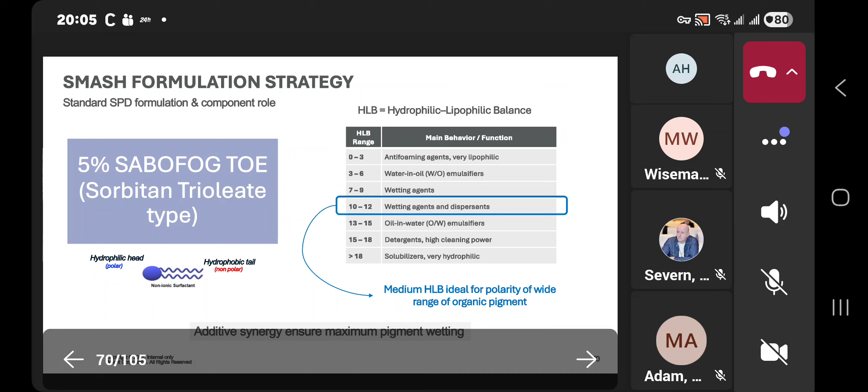In addition to the surfactant testing, we used some statistical tools as well to fix the better ratio between the PE wax, the water emulsion, and the surfactant. The output is the pressure in that case, meaning the dispersion result via the filter test.

We know this is working pretty well for a wide range of organic pigments. We also know that we can increase the amount of water emulsion a bit for very critical pigments, but still without using any specific equipment to remove the steam, like the vent stuffer.

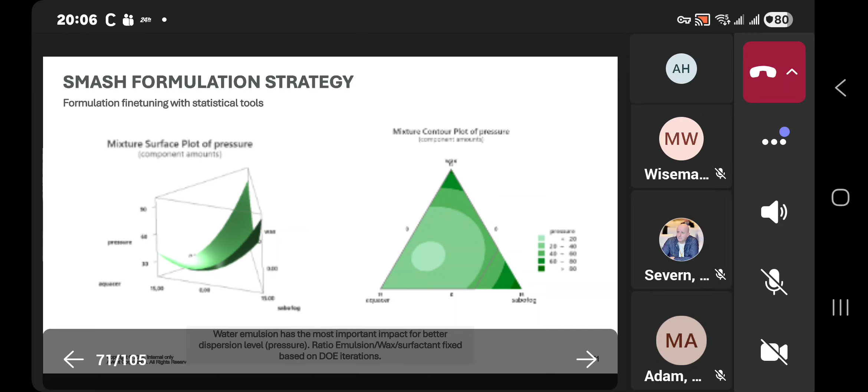We all know that we need mechanical work via extrusion to disperse a pigment. So here is how it works: the water of the wetting agents wets the pigment particles, increasing the bulk density and enabling optimal feeding into extruders. The surfactant creates a steric barrier due to polarity differences between the water, pigment, and polymer, preventing agglomeration. Finally, the extrusion process is designed to evaporate the steam and break any remaining agglomerates.

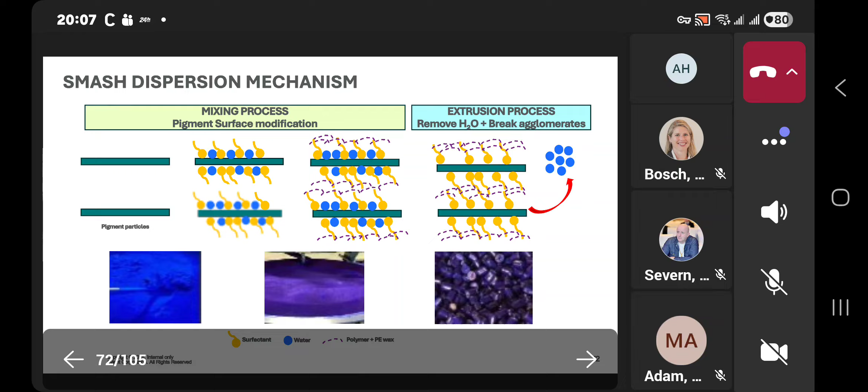Water in an extruder can be confusing for those who do not know the technology, but this is really beneficial in the process to adjust the viscosity of the material and also to boost productivity.

What's great is that Smash achieves optimal dispersion using standard mixing and extrusion equipment already available at Avient. No major investment needed, no complex retrofitting. High-speed mixers and container mixers have been validated, so the mixing time and cleaning time is significantly reduced compared to the hot cold mix technology.

In terms of extruder, shorter extruder shows good performance today. No vent stuffer required anymore. Just an efficient vacuum system is needed in combination with the right screw design to reach the optimum dispersion level.

And for some pigments, we almost doubled the output. It won't be the case for all pigments, but this is really promising and it could give real value to this new technology.

For sure, there are some adjustments to be done versus the hot cold mix extrusion process. We need a more aggressive screw profile, a lower temperature profile, and we need to increase the RPM and lower the feed rate to induce even more shear to the material.

But that's something manageable. All the plants producing today with the wetting agent technology should be able to switch quite easily to Smash, and we had confirmation here on our plant in Assesse in Belgium. Via several industrial trials, we also demonstrated that the hot cold mix expert plants like Lomagna in Italy or Sant Andreu in Spain are able to produce Smash as well.

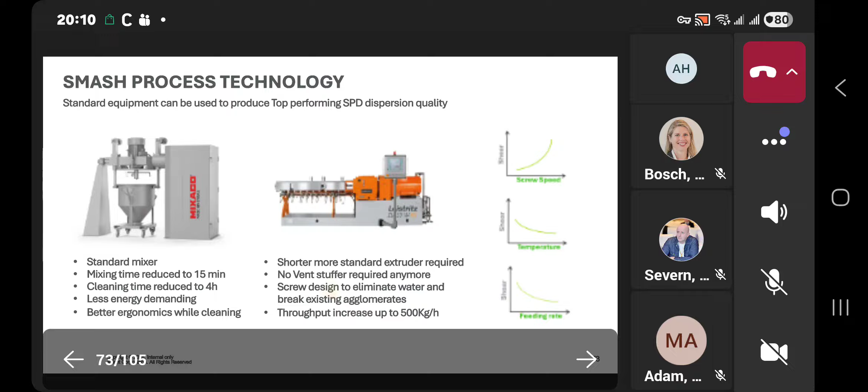Next slide, please. It will be the last one. To conclude, I would like to share where we are today. The technical part is now under control and we are starting the customer validation phase.

I won't enter into details on this, but I would like to highlight that the hidden part of the iceberg would be the implementation when everything is approved. Indeed, the Smash SPD formulation is different from the hot cold mix formulation that is used today.

We are adding some additives, meaning new CAS numbers, potentially SML and dual use additives compared to what the customer is using today. If we follow the rules, it would mean we would have to create new product codes, new validation with customers, and so on. Knowing that 50% of our color portfolio is dedicated to highly regulated market segments, this represents a lot of work.

But we have a chance that all these changes could be drawn into the 19th amendment change environment, so it can be the right moment to change. But that's not my decision. The next step and implementation strategy will be discussed with the top management in the near future.

I would like to finish with fingers crossed, and I hope we can implement this quite soon. Thanks a lot for your attention. If you have any questions or need more details, please reach out to me or Jody Rigrant, for example. Thank you.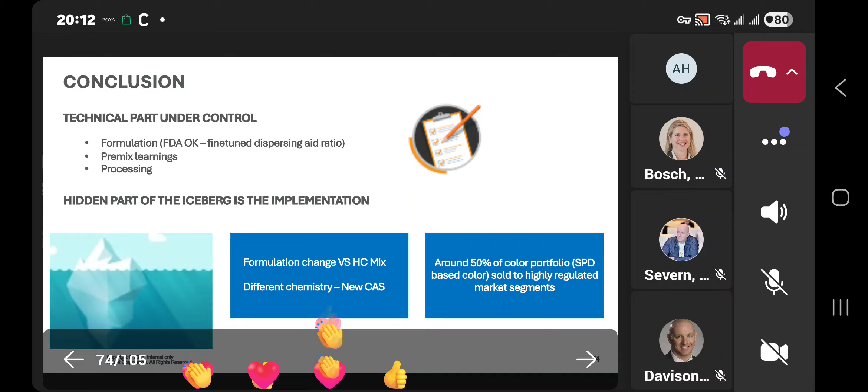And now I encourage Mehmet and Laura to go through the topic of UV-rated flame retardant grades for the appliance market. Yes, thank you. Good morning and good afternoon, everyone.

Today we want to share our work on especially PP-based UL94 V-rated flame retardant solutions for the appliance market. Actually, this project was started 2 years ago, and now it is a good opportunity to share technical details with you. Today, I am Mehmet Güçlü, together with my friend Laura Carlizo.

We will try to explain why this requirement became so important and what technical challenge it created for polyolefins, the solutions Avient has developed, and how we managed to attract our customers. So let's start with the strategic importance of this topic. Next slide, please.

The trigger was the tightening of refrigeration safety requirements after the Grenfell Tower fire in 2017, which unfortunately had 72 fatalities. Following that, the related IEC standard was published in 2020, and its implementation became mandatory in September 2023. The practical result is that the appliance insulation should be a metal or a 5VA based polymeric material.

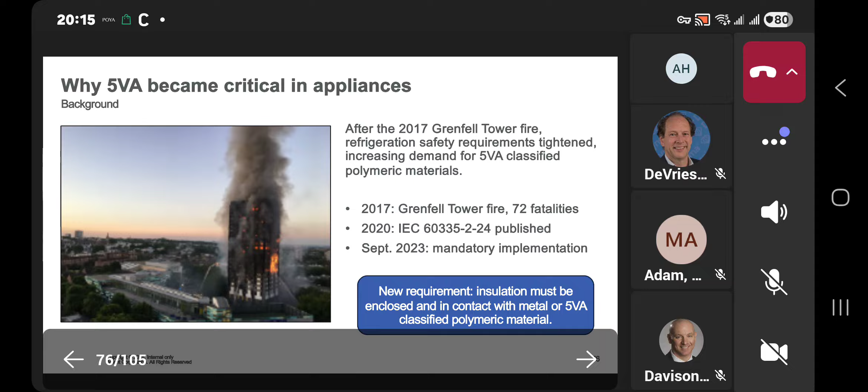What problem are we solving? OEMs need fire-safe polymer solutions that can replace or reduce metal without sacrificing usable internal space, with lower cost, easily moldable materials, and of course with long service life.

Moving from metal to polymer gives more design freedom to us, but only as long as the compounded polymer can meet the new fire requirements. So the problem is not just flame retardancy, it is bringing a practical appliance solution with the right balance of fire performance, thickness, and manufacturability. To understand why this is difficult, we want to explain what 5VA actually means.

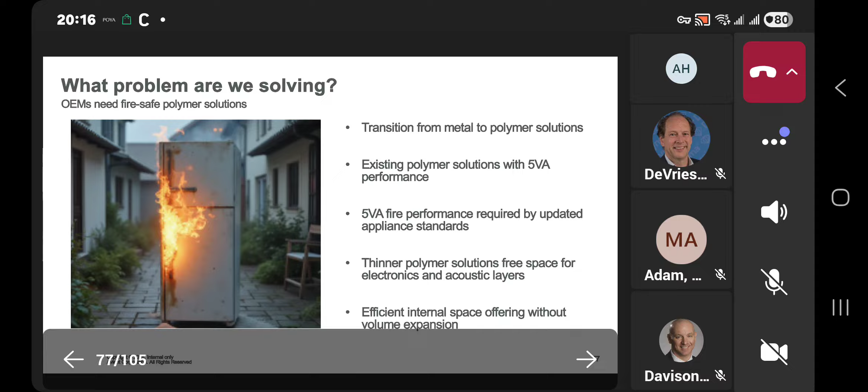What is 5VA? The name 5VA comes from the test, which is 5 times 5, meaning a 5-second contact with flame and then a 5-second rest. 5VA is one of the most severe UL 94 classifications because it requires successful performance in the bar test, but the plaque evaluation is also important.

It is not enough for the test bars to self-extinguish. Additionally, there shouldn't be any hole formation in the plaques. So when we say 5VA, we are talking about a much tougher requirement: no cotton ignition, no long after-flame, and no plaque burn-through. On the right side of this slide, you can see some plates with hole formations in the middle. These are not okay parts because the standard only allows hole dimensions up to 3 millimeters.

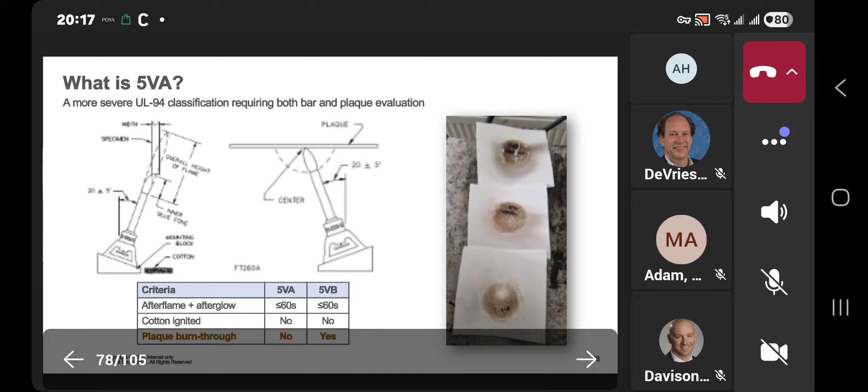To work on this, we needed internal capability for proper testing. To support 5VA assessment and to improve ourselves, plaque geometry, molding conditions, and the test chamber are the main parts of proper testing.

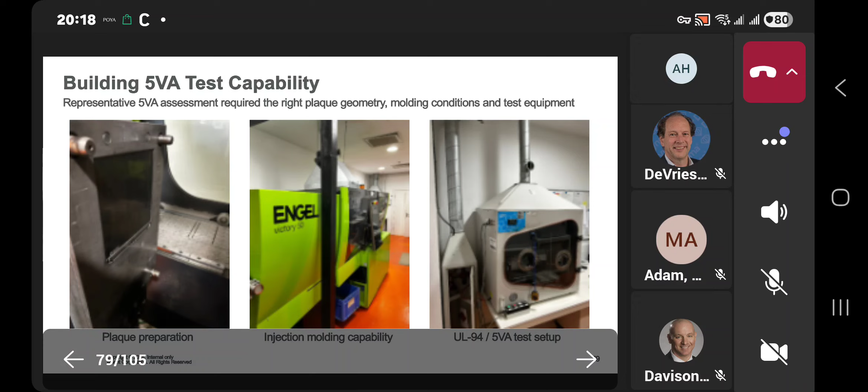For that reason, we first invested in a 5VA plaque insert for 1.6 millimeter thickness, which is the most common reference for flame resistance polymeric materials. At this step, thanks to the US team, because they supported us very effectively in testing our samples as an accredited laboratory. For the Istanbul plant, a new UL 94 test chamber is planned to be activated within this year. Now let's talk about the technical challenges we faced during this project.

Achieving 5VA in an unreinforced PP is not only a formulation problem, it is a combination of FR chemistry, matrix interaction, and processing.

Internally, we saw that thin wall stability depends on the FR type and loading. During our work, we saw that PP copolymer showed better dispersion than PP homopolymer, and that higher viscosity PP performed better than lower viscosity because of the dripping effect, of course.

Since these NHFR systems are sensitive to shear and temperature, we prefer a low temperature profile and a proper screw design for our future plans. So the challenge is really in chemistry, resin selection, and process discipline. So, what is our current system?

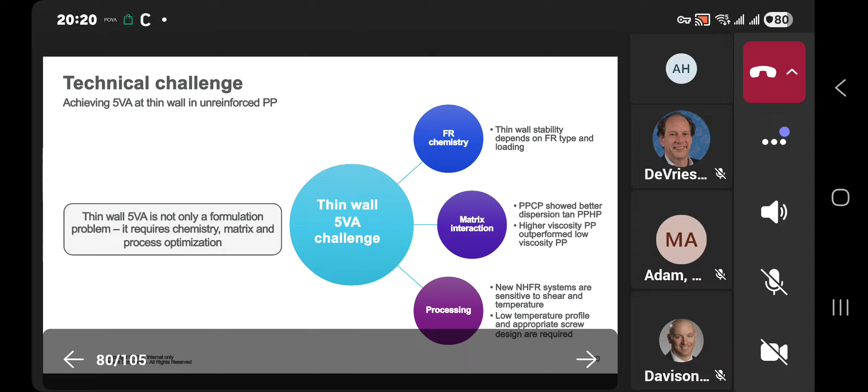Our current technology development is based on a halogen-free intumescent system with char-forming behavior, using a phosphorus-nitrogen-driven approach for polyolefins, especially for PP. Since our customer requests are for non-halogenated systems, we tried different NHFR systems and saw that depending on the customer process, the color of the parts, the wall thicknesses, the geometries, and the volume of their machine can affect the performance of the materials.

These factors directed us to use different combinations in different formulations. So currently we have a set of solutions for several customer requirements. And now I am leaving the stage to my colleague Laura Callizo.

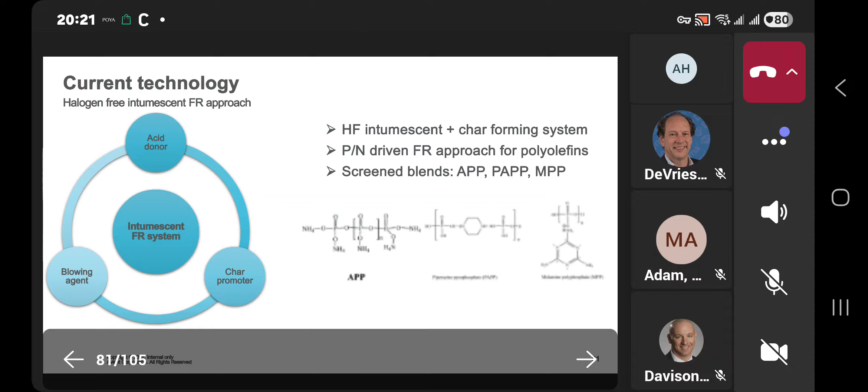UL for this grade has not started yet, because we are waiting for those results. But what's important here is that these three grades cover different maturity levels and different customer needs. Overall, the portfolio already gives us two credible 2.0 millimeter routes today, while the 1509 is the program that could extend us into the more demanding thin wall space.

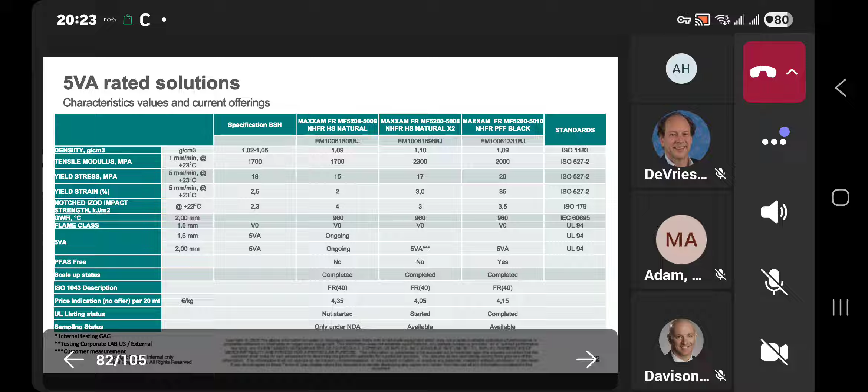So beyond these grades themselves, the next question is, why are we in a strong position to convert this portfolio into real business? Next slide, please.

What is making the difference for us is not only the material itself, but the way that we are supporting the customer from development to industrialization. Because we have already real solutions moving into the market, but at the same time, we are able to react quickly during validation, during the scale up, and during supply discussions.

And that really matters, because in those type of applications, customers are not only choosing a formulation, they are choosing a partner that can help them move fast from testing to implementation. So our advantage really comes from combining technical credibility with execution speed. Next slide, please.

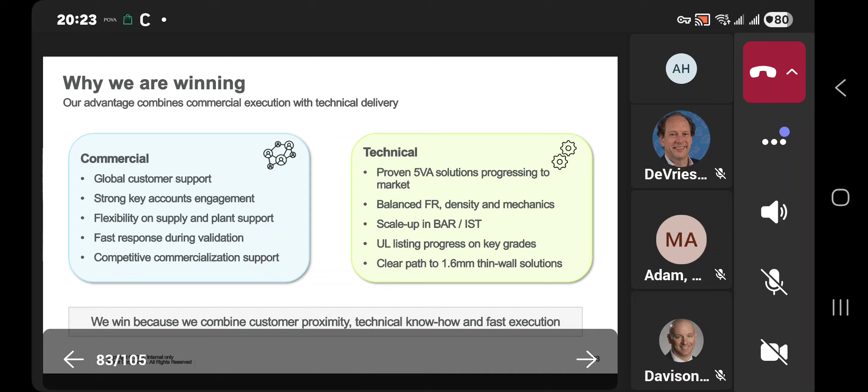The one on the left, Arçelik, the grade chosen was the 5008, validated for a refrigerator chassis application. We have already delivered 10 tons year to date, with a forecast for 2026 of 60 tons.

The other project, for Scherdel/Bora, the grade selected was the 5010, validated for a fume extraction application. There we have delivered already 26 tons year to date, with a forecast for this year of 250 tons. We think that the applications themselves are important, because they show the breadth of the opportunity.

On one side, we are in the classical appliance structural component, like the refrigerator chassis. But on the other side, we are already engaged in a different use case, such as fume extraction, which shows that the platform can go beyond one single part design.

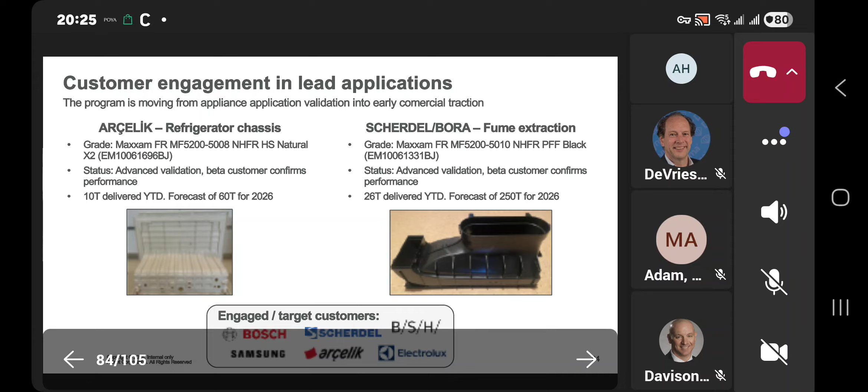And moreover, we have those two cases, but we are also engaged and targeting key players, like BSH, Samsung, Electrolux. So this opportunity is no longer theoretical. It is already linked to concrete applications and active customer programs. And to make that possible, a strong execution across the teams and sites was essential. Next slide, please.

So one point that we really want to highlight is that this program was not only developed by one person in one site only. It was built through very close collaboration across multiple locations, each one contributing to a different part of the work.

So, for example, sample production was mainly done in Barbastro and Istanbul, but we have additional sample production also in Mele. The scale-ups were carried out in both Barbastro and Istanbul, but for 5VA molding and testing, Avon Lake played a key role, while there was also some 5VA testing supported in Gaggenau and Istanbul.

So you can see that there was cross-site collaboration. And this was important not only for the speed of the project, but also for the confidence in the data. Because when you have mold, sample production, the scale up, and the 5VA across different locations, it allows us to cross-check the work, to de-risk the program, and to move forward with a broader technical database.

So this is really a good example of how combining capabilities across sites allows us to move faster and progress the program from development into customer validation and commercialization. And from here, the next steps are clear. Next slide, please.

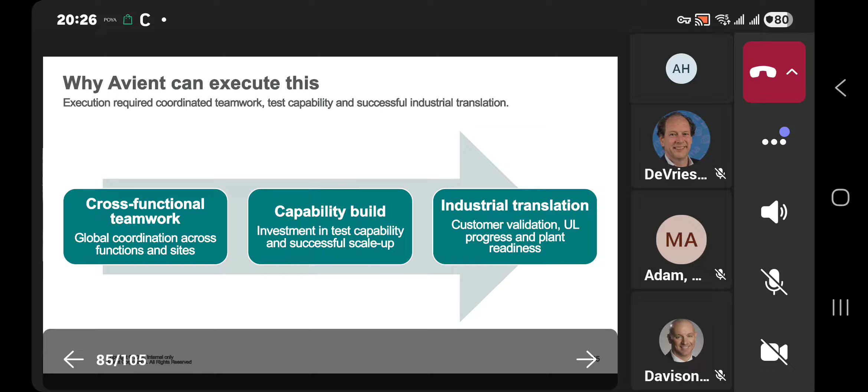As mentioned, the next steps are clear. We need to complete the IP review, confirm the data required for the launch package, move through the go-to commercialization gate review, and prepare the seller training. In theory, all those actions should take place during this quarter, so in the coming months, everything should be over or ongoing.

In parallel to those actions, we also want to strengthen the flammability testing capability that we have in Europe, including the UL94 cabin upgrade in Istanbul that my colleague Mehmet commented. We are also planning to expand the molding capability in Gaggenau and Barbastro.

As you can see, this story is clearly not finished. We already have early commercial traction, and the focus now is to industrialize the solutions. We need to strengthen the capability base and grow the platform. The next phase is really about turning what is already a technically and commercially credible program into a broader and more scalable platform.

With that, we would like to thank you for your attention. I want to remark that for us, this program is a really good example of One Avient in practice, because different teams and sites worked together to turn a technical development into a real commercial opportunity. So thanks again, and we will now be happy to open the floor for questions, in the chat, or we can connect separately later. Thank you.

Thank you very much, Laura and Mehmet, for that nice piece of work with that global collaboration. I suggest we move to the last presentation of the day, which will close the 3 days of intensive and very valued time on Technology WolfPack. Color Chromatic will be presented by Zhao, who will talk about the item biocompatible color range called Transcend. Zhao, the floor is yours.